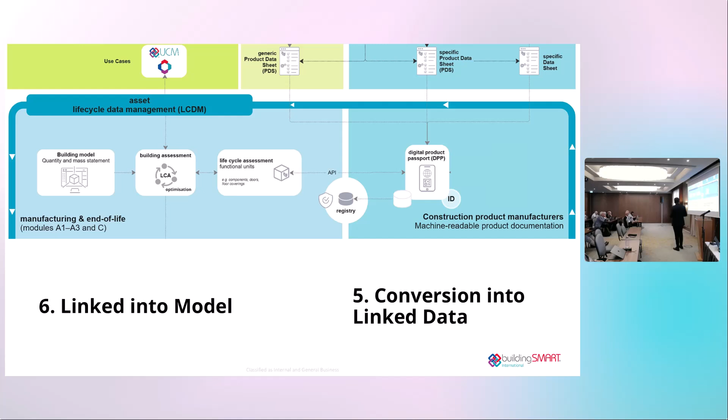Yes, and that's how this complex overview gets understandable and makes sense. I called it so far a bypass. So we can already work with generic data, and that could be a strategy to really make it happen for the construction industry.

So that was the conclusion of this first part of our flowchart, our theoretical example. Manage EPD separately. EPDs are not harmonized in Europe, but they become functionally harmonized by reference in every harmonized standard, and EPDs are an international standard, as we saw with ISO. So this is relevant.

And so the product EPD can refer with a URI, a link, into the DPP. That means we have a cascade of links, related information, and the building model becomes like a browser. So we have links, and things are not all imported into the building model, but the algorithms can then call the APIs and really take the information they need.

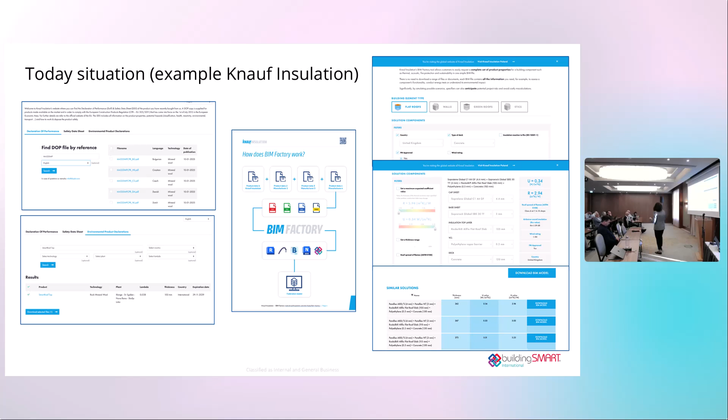And we want to switch to something much more digitalized. So we said, let's put the targets for this. With this pilot, we would like to structure the data from DPP to be integrated in the openBIM solution. We want to really understand how this enables life cycle-based decision making.

We started the discussion on this pilot before summertime, so we had the summer to prepare everything. It was working, and it really required our personal involvement to make it happen. So we said, in terms of data flow, this is how we see it today, and there was discussion - do we see this from the manufacturer's point of view or from design and construction?

So we are not sure still about what should come first: the data dictionary, which contains property definitions, or the template, which specifies the property list to be declared. This is what we discussed yesterday. I put it this way - it was 2 against 1.

So we started with this. Maybe we'll review this data flow process. The manufacturer will prepare product data and property values, and data will be validated and published with a unique URI and GTIN. I think this is very important for us. By the end, it was really to provide benefits for designers and contractors to embed this data in the IFC model, and in the future for asset managers to access the DPP via BIM product codes. I think this point will be very important for us too.

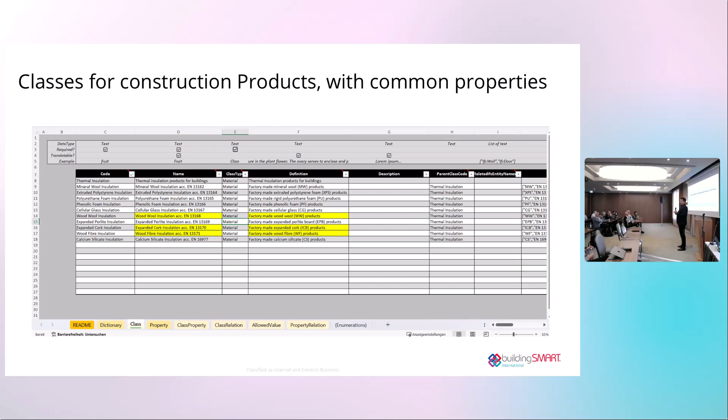We can see how it's described in the standards. We try to have a bunch of products that share similar properties, which makes sense so we don't have to pick up additional ones later. Then we selected the properties along with their units.

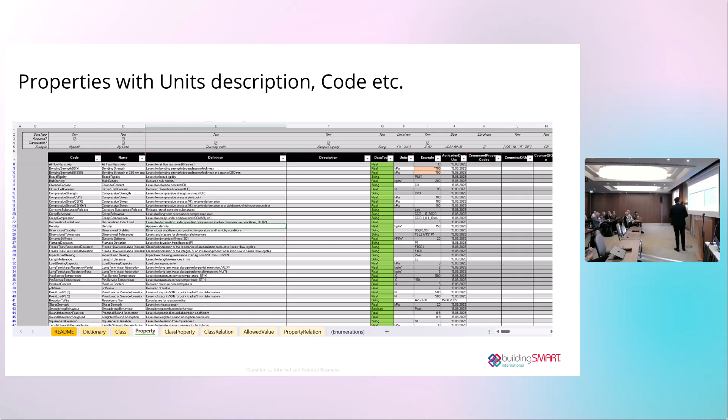This is the full picture - different standards share some properties, but also have some only for themselves, and that's how we describe the class-property relation. The classes are the different materials based on harmonized standards, and that's the relation we need to define here. The allowed value, which is actually the dropdown we'll see later, gives us a good selection of classes or values that are allowed, and you shouldn't write anything else. So it's really good to prepare a dictionary like that.

And now we start with the demonstration of how to merge existing product data with this data dictionary and put it into the building model. Arthur, it's your turn.

Thank you, Hansueli. And I'm really proud that Hansueli did all of this demonstration how to upload to BSDD, because I did it a few times, but people don't trust me. So it's good to hear from the actual users that it's fairly simple. I only helped a bit with some small issues, but you did all of it yourself, and I will just present the results from it. But yeah, congrats, Hansueli.

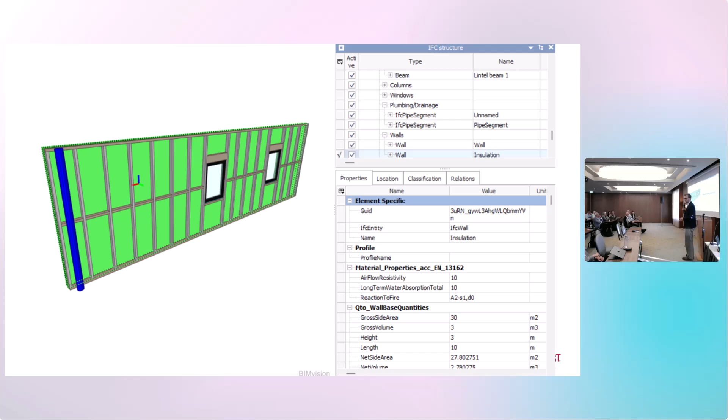Then when I click on the lintel beam above the window, I can also see the technical properties about wood. There is one caveat that they are described differently. So there are some inconsistencies between this form and that form, and that's all because the standards are not always aligned. So that's something that we really need to work on together, or we expect that the standardization bodies will harmonize all of those at some point.

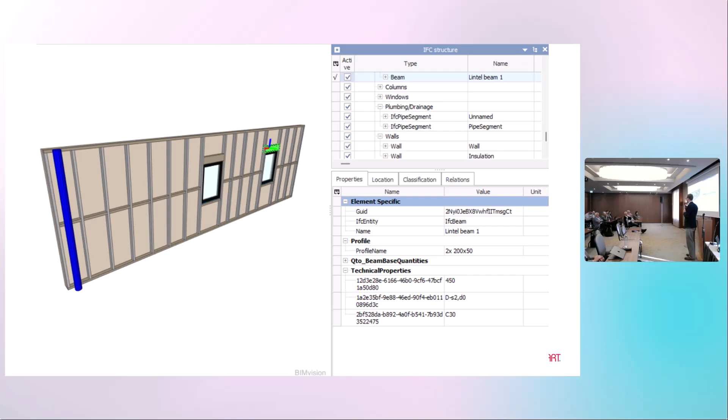And the third example is the plastic pipe with properties that are very specific to plastic pipes. And what you don't see here is that all of those properties in the model, if you actually open the IFC file, also have the identifiers pointing to the definitions. Right now we are pointing to the BSDD page, but this could as well point to the European Data Dictionary when it becomes publicly available, or to the ISO page with those definitions. So we are taking our offline files to the linked data world of connected definitions.

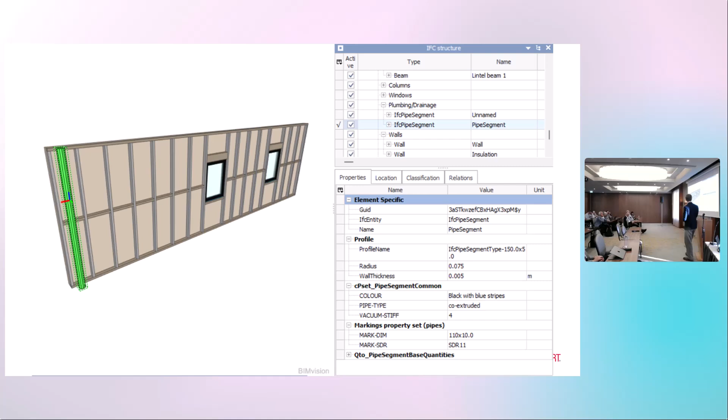And now I hand it over to Hansueli to show some automation.

Start and stop. We want to do the video. Okay. Yes. Just set that up. Yeah, I have to start and stop, then maybe I have to sit there.

So, yes, we did a little hackathon. I have a friend in Switzerland. He's very talented in coding. And Louis Trumpler said, okay, I do it. And he had only a few days until today. And so he sent me a video, and I tried to guide you through. Maybe it's too complicated, but I thought we have to show it because it was great work.

There is also a new draft of a standard, EN 18222, which describes actually the connection from databases to the IFC. So 18222 is obviously the missing link between structured data and IFC. And he tried really to now pick up our existing product data sheet in PDF, the data dictionary, and this logic of linking.

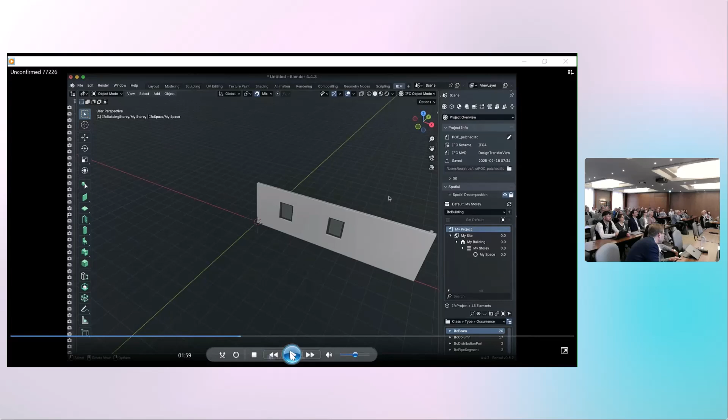And as we saw, people think already about it, to standardize such connections with APIs so that our building model can call URIs. I don't understand what this is. Can you explain that bit? No, I cannot. It's code. And at the end, the code looks like that.

And that's actually where we are now ending, where Arthur started. We have then the imported properties, GS1 ID, also a big ally in supporting this topic, and then the EPD data. And we also want to cover the DOP topic. As Magda said, we don't want to have it as a separate sheet. We could include it all together, and at the end, this gets more efficient for manufacturers. Imagine also the whole chain with the traders and so on. It will simplify a lot over the whole value chain.

But manufacturers have to invest a bit more in preparing the data. They become now really a part of the planning, as it should have been already many years ago. And we have also those links here in the model.

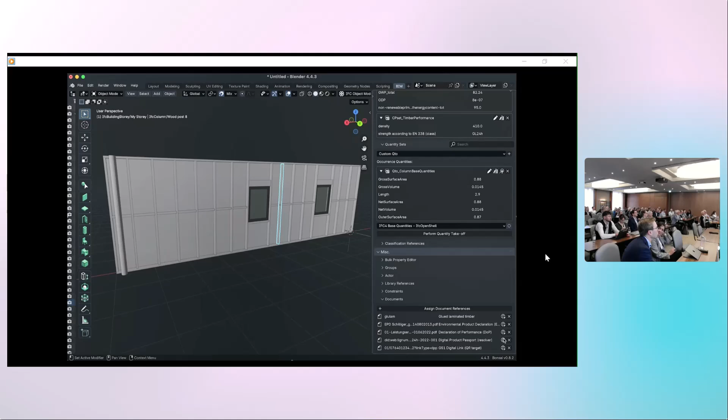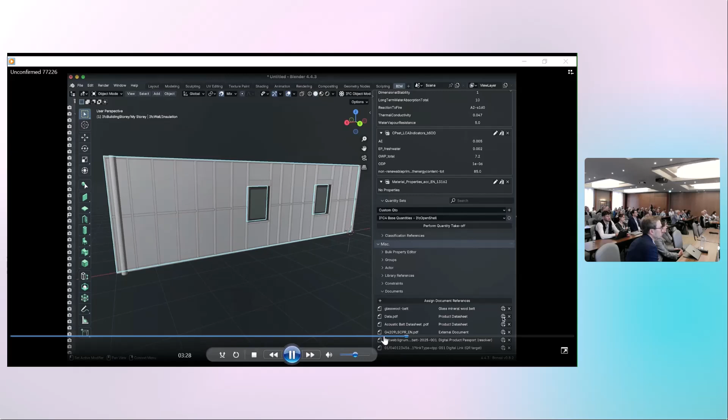So the future looks nice. I hope we will continue this way. The fact that he was able to do this in several days shows that it's possible. We have to deliver our knowledge from different industry to this data dictionary. The industry has to deliver the values, and then algorithms can do a lot of things with all that information. And I think that was the missing part so far.

In all the discussions we had today, it ended always at the source of information, which was not structured in a proper way. So I think I can move forward here. And yeah, maybe we have some time to discuss and for questions. Arthur, you continue, of course. Yeah, it's not finished, because we see now how the future would look like.

Yes, thank you. Actually, can we replay the video? I just wanted to refer to one point in it. Okay. If you still remember the video, I can just talk about it.

So at the end of the video, there was a screenshot from the interface showing the wall, the properties, but also the documents. And the documents were not embedded in the IFC. They were referenced as links, but this software was showing them in the interface, which is really nice. But sadly, most of the tools that integrate with IFC don't show those document references.

That's why we still have the tendency to copy paste the data from the manufacturer's website to the model, because we want to archive this data for the handover, for example. And this is a common practice. So we often struggle between how much we should copy paste to the model and how much should be just referenced to the original data source.

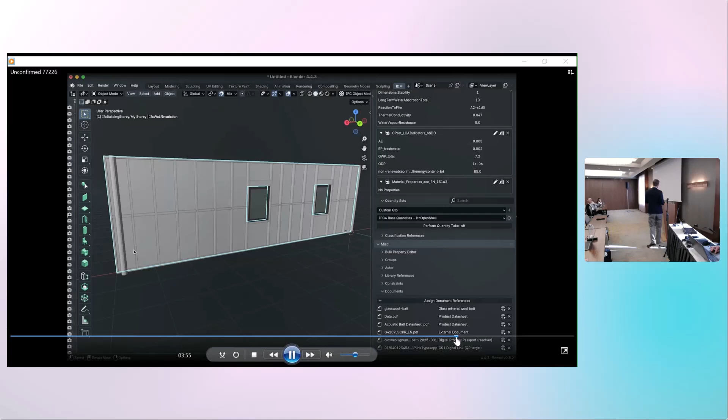Yeah. It's dead. Is it coming from this one or that one? So, it will be, yeah, it is.

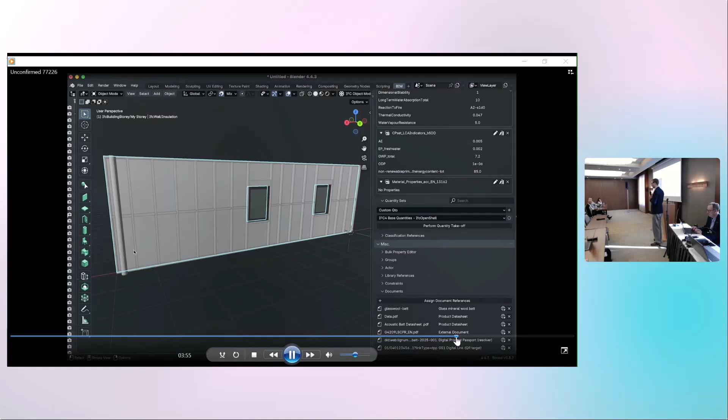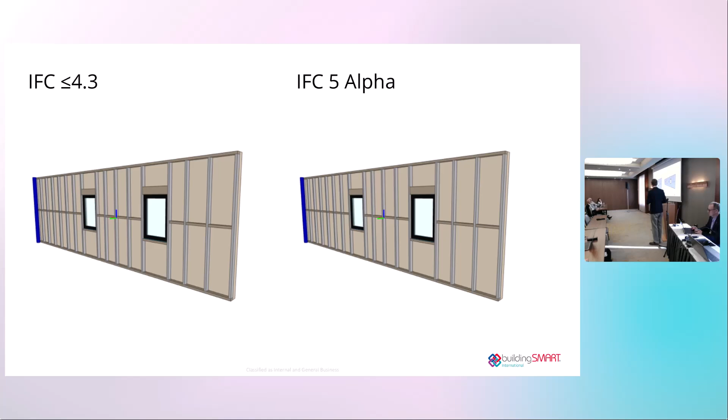So the first thing I want to start with is that the majority of the use cases will not change. For example, when we look at the geometry, it will be exactly the same. We are not revolutionizing that much. The data, the information inside will also be preserved. So we are not taking away anything. We will still have the same data in IFC, but from the technological perspective, some of the things will be improved, will be different. If you open the file, it will look different.

Right now, we are still discussing how it will actually look, but I took an example. It's not the same data. It's just to demonstrate that how the data will be serialized will be a bit different. How the geometry will be assigned to objects, how materials will be assigned to objects will be a bit different, but the information part, the semantics, will still be preserved.

And this new IFC, what we right now call IFC 5 Alpha, or the next generation IFC, is quite similar to how DPP standards already described that DPP should look. So we are already considering whether it would be possible to embed the DPP data in IFC or make references so that the software could pull the information from the DPP registry directly, so we don't need to copy paste the data.

But from my perspective, the very important distinction between the IFC that we know today and the one we are working on would be that we will preserve the authorship of the data, and it will be possible to always trace back who came up with this value. Does it come from the manufacturer? Does it come from the architect?

Was it changed in the process? We can also see the definitions. Where are they coming from? Are they coming from GS1, buildingSMART, maybe from the European Union, so that we provide more transparency in the process. And some of the other changes will be that we will try to make the implementation much easier and faster compared to what we know so far.